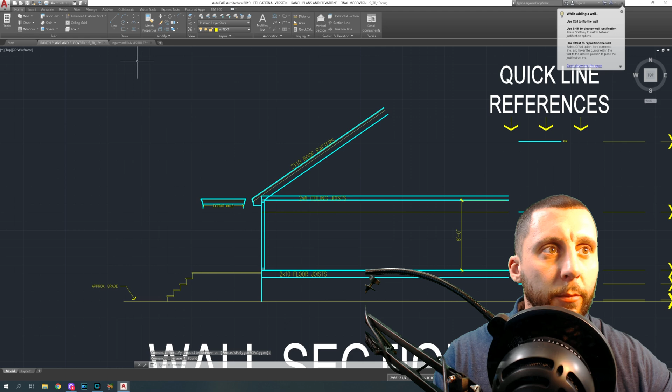So, why is that popping up? Alright, so here we go. So we were in here, okay? We did our trim and fascia board, and this is what it's going to look like from the side of the house. One thing I wanted to point out before we go any further was that the main part of this house here, where my main gable roof is going to go across, comes out to be 30 feet. Okay, so that means that the peak of that will be 15 feet in.

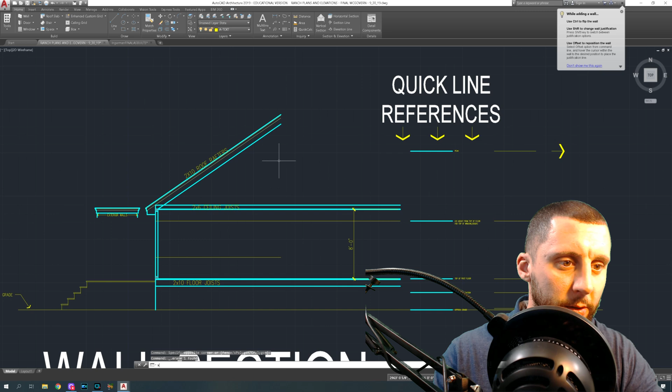So yesterday, I believe we took a line, and we went 15 feet, and then we went up. That means that all of these lines are going to get extended there, and that tells us that our peak is at this very top point. So now I'm going to move all of this stuff out of my way. I'm going to move this up and that up. Based off of my blue peak line, I'm going to go up on the green line until I get to my yellow line. All right, so that's where my peak is.

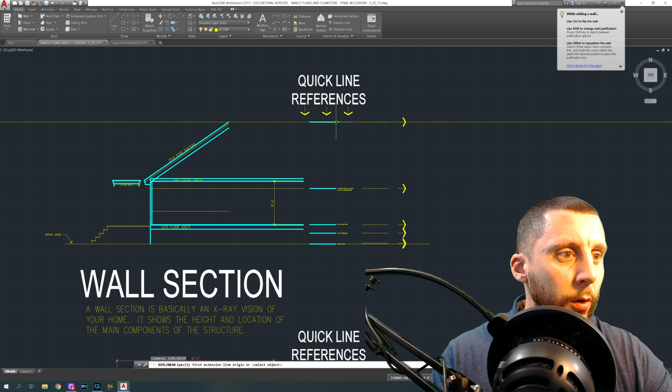So now when you were doing your measurements, hopefully when we go to measure this peak here from the grade, your measurement when you were standing outside trying to snake your tape measure all the way up to the peak came out somewhere close to 22 feet 6.5. Now again, this house doesn't exist, but if you're 22 feet 4 or 22 feet 8, you're pretty close. It's really hard to get that measurement, but if you're off by like 6 inches or a couple feet, then that's not good. Okay, so that's our peak.

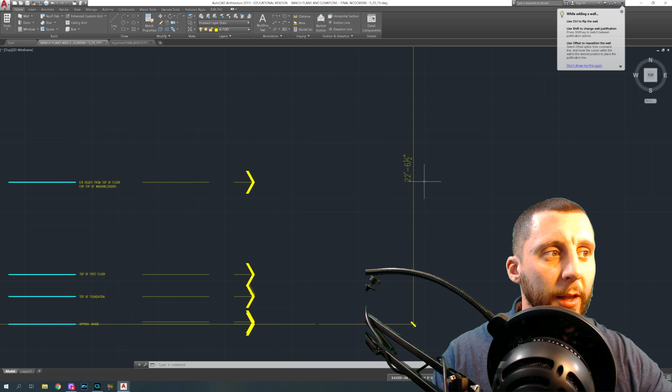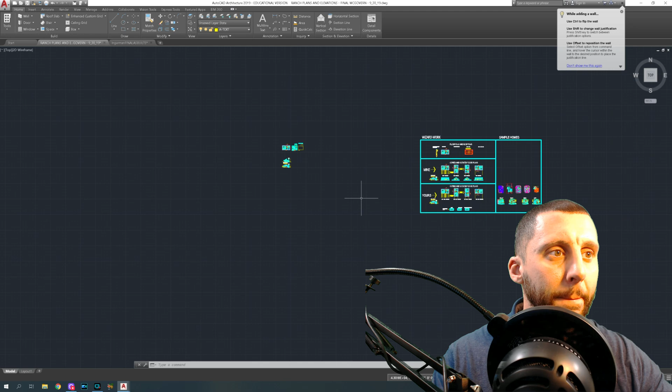All right, so now we're going to get rid of this line. We're going to finish what we were doing over here. This is what it's going to look like from the front of the house. So if I were to show you some other elevations, you see that these lines go across the front of the house. In the side views, they go up, which is what we already have. Okay? All right, where are we at? So here's what you do. If you're modifying one that I have, you would take construction lines, X line, and you bring across this, this, this, and this, and you can see what that's going to do to change these lines. If you don't have mine, then we're just going to make this from scratch right now.

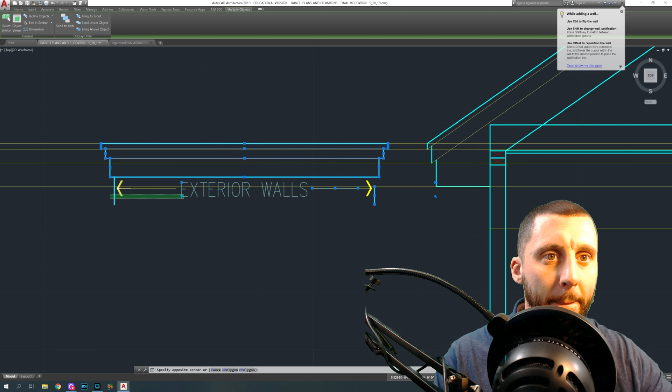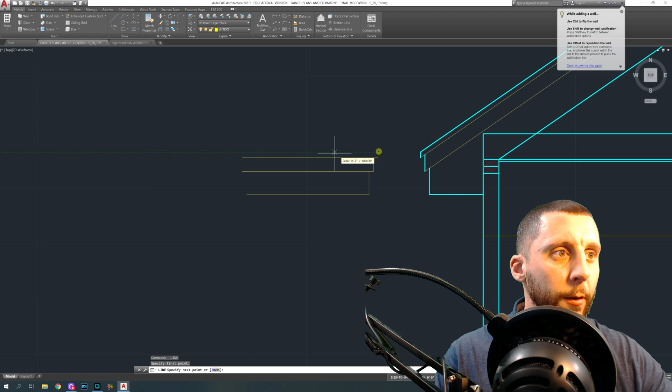You got 4 lines like this. Go here and slide, click and go down. Then you're going to go in 1, and you're going to go down, and then you're going to go in 1 again and go down. Get rid of this arrow. And then you can get rid of these. We can take these horizontal lines and bring those across. You're going to have a line going across here and up here.

And then I like to take these 3 things right here. Make sure there's no little baby lines. Okay. Take 1, 2, 3. Mirror that across the midpoint. Erase the source, no, and extend. And you get something, this one's a little long. You get something like that, okay? Match properties, as you can see, I did some match properties on mine. The blue stuff is going to be the top and bottom line, and the side lines. 1, 2, 3. 1, 2, 3. And then this tan color for us is the actual fascia board and trim, okay?

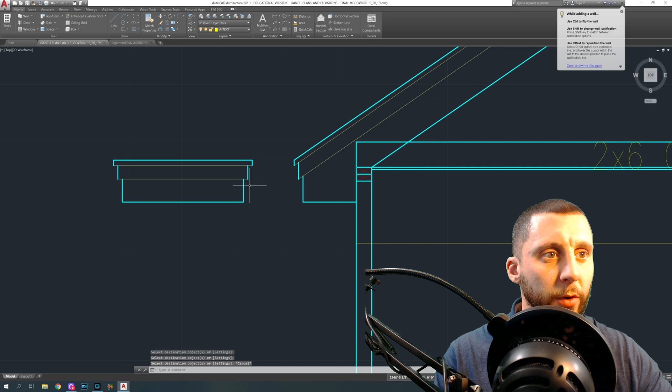So now we have that. So what I would do is I'd bring that across. Copy. I like to leave it over there too and just bring a copy over. And that's going to go right here. And I had some text for that. Let's see if we can get that back. Trim and fascia board. Oh, and we'll grab some exterior walls too.

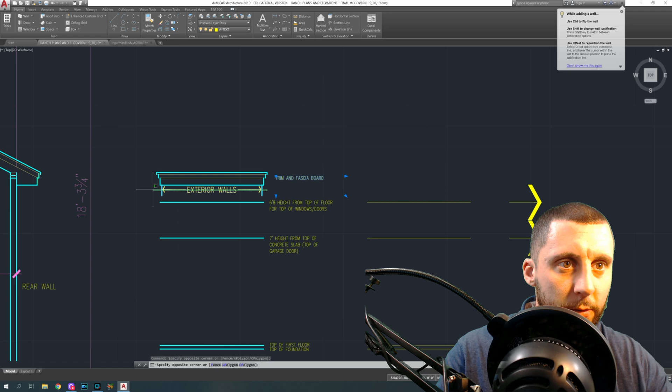So that's going to go. I like to keep everything super organized and neat. So that's going to go something like that, only this is going to be on that corner. And we'll just get rid of these lines here. That's only if you're trying to keep yours neat.

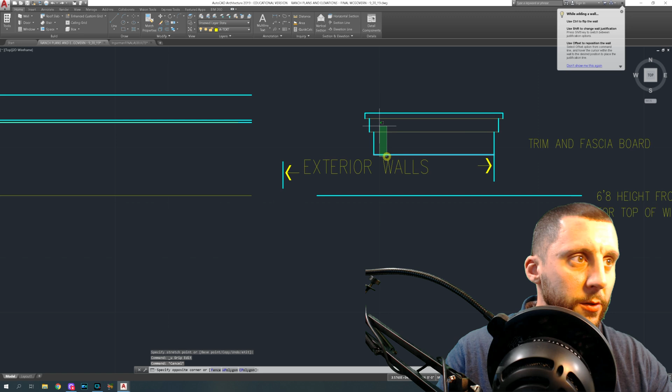Probably going to have to drop this down to another line. Or, you know what, let's do this instead. Why don't we just go like this with a box, stretch that out a little bit wider. And now I can move my text over.

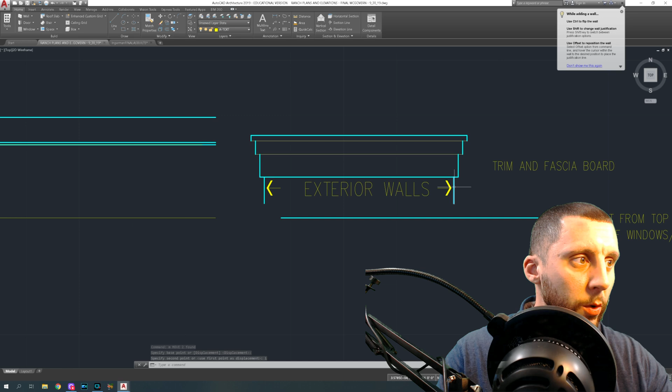Move my arrow and my line over. Oh, and by the way, these are actually 1 inch further in. So it comes like this. It goes 1, 1, 1, and that's where the exterior walls are. So later on, when we bring all these lines across, we'll be able to bring this entire piece all the way across the front of the house and all the way across the rear of the house.

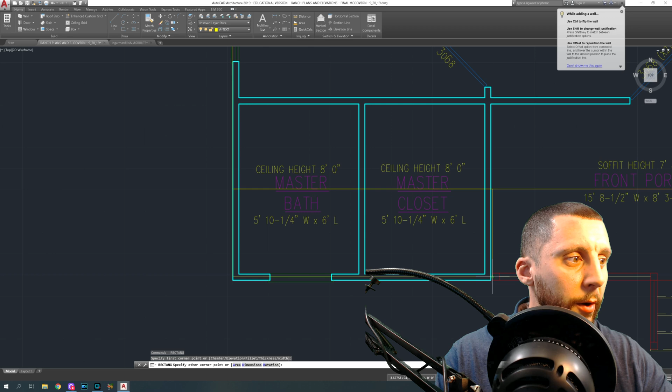Okay, but we'll get to that next. Okay, next thing, foundation. What you're going to want to do is you're going to want to take a box here. You're going to want to go over this back area, which is going to be its own little area. You're going to go over the main part, which is going to be from here to here, and then you're going to go over this little front bump out right here, from there to there. You take those 3 boxes, you move those over.

Okay, then you're going to start a wall. You're going to go to, I hope you guys have all these options. If you don't, you can open up one of my past files and you can just grab it off of one of the drawings in there. But you want CMU 6, and basically this is just going to be all the way around the outside in this main piece.

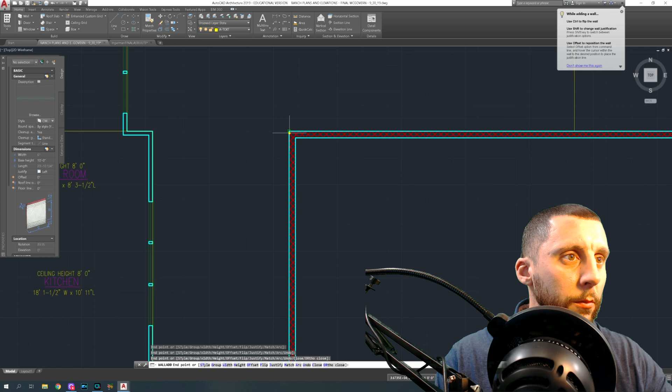Okay, that part's the easy part. This is going to get extended down.

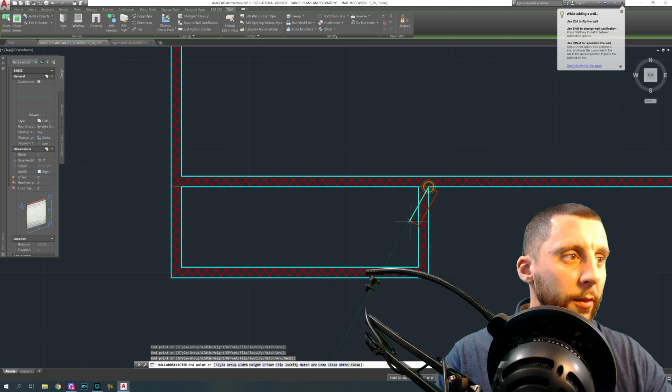I can click on this again and do add selected. I have to change my justification though, so I hit shift twice. And then I come in like that. And then I want to go ahead and erase the boxes that I have behind.

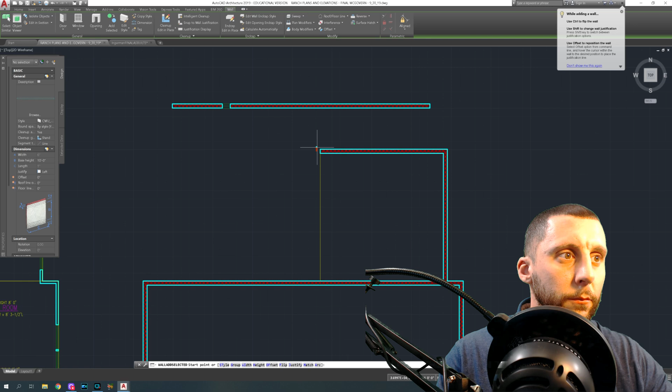There we go. And then we're going to do the same thing. Add selected. Go around the outside here. Change my justification. Bring that part in. Get rid of the box.

All right. Now, in the middle of this house is going to be a big girder going across, because I would assume that these floor joists are going to be running this way. So what you want to do is you want to take a line, and again, this you would have measured, so you'd be able to tell, like, oh, okay, in the main part of the house, there's a girder going down the middle.

What this line is going to be, we need to know where all the little piers are that are holding this girder up. So what's going to happen is that girder is going to sit on top of probably a little block work right here and a little block work right here. But again, this could be totally different. It could be sitting on top of the block work that's already there.

The space between these piers of blocks or block work, it could be every 6 feet, it could be every 12 feet. It really depends on the house. So you'd want to get into that crawl space and you want to measure all of those things and know where those things are.

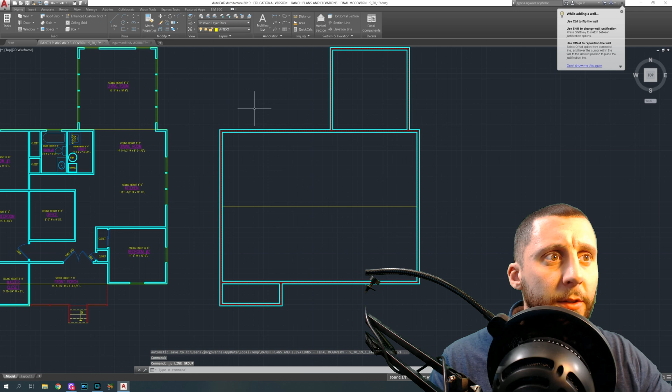So in order to do that, let's just say that we have a line here. Actually, before we draw that line, let's take one of these and just pretend that we've got, let's say, 2 blocks here. So we're going to go 16. And you know what, that could be 1 block, 8, something like that. I'm going to take that and mirror it across.

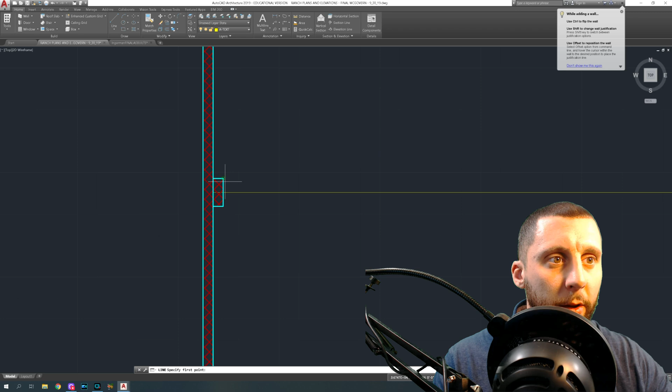Erase the source. No, okay. Now let's just pretend that we have a line here. I'm actually going to make that longer so it's easier to erase. And let's just say we have a line in the middle. Clearly there's going to be one in the middle here.

So again, click on your wall, add selected. Now also, you see up here, this looks like a window, but it's actually a vent. So if you notice that there's flood vents around the outside, it's not imperative that you have the position of them, but it's not bad to know that on the plan.

So if you can get those and figure out where they are, you can do that on the exterior by measuring on the foundation and saying, okay, I've got one at 8 feet, I've got one at 12 feet, I've got one at 10 feet.

Oops. Hang on one sec. Why is that popping? I'm still recording.

Yes, okay. All right, so we're going to have one in the center there. So we're going to grab this wall and do add selected. Let's say we go 8. Oh, come on. Another 8. Maybe this one is a double.

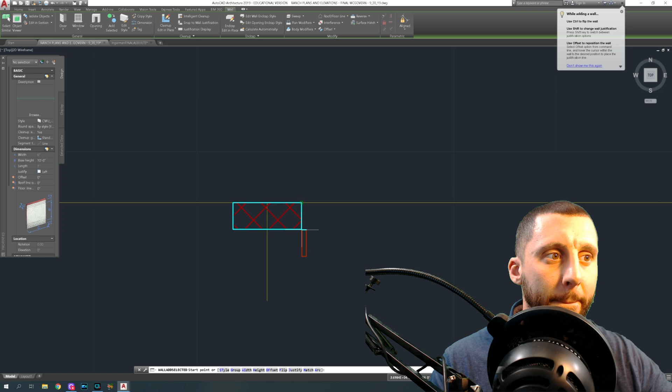It doesn't like that. Why is it not doing that? Here, let's try this again.

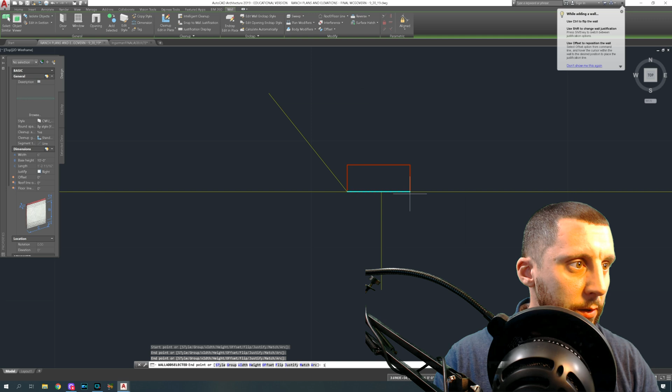What I'm going to do is draw a line off of this corner, my start point. Let me get rid of this. Okay, we're going to do another add selected. We're going to go from here, 16... yeah, see, that's the same thing.

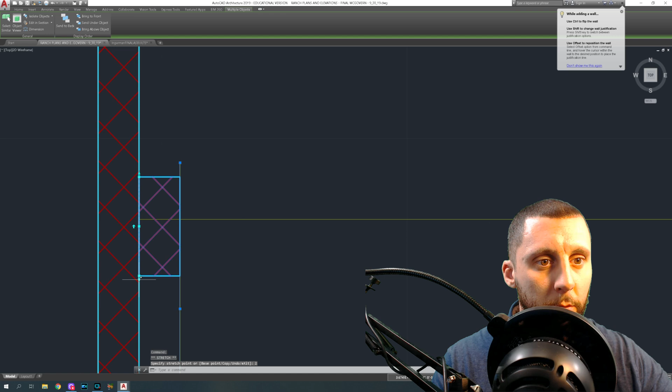Oh, why am I going 16? It should only be 12. Sorry, these blocks should only be 12 inches. So we're going to go 2, 2, get rid of, and we'll keep that for now.

I'm not sure why this is coming up with an error like this, because these walls are not on top of each other. So I'm actually going to just put 1 just so it doesn't give me that error. And then I'm going to drag this back just like I did on the other one, 2 inches on both sides.

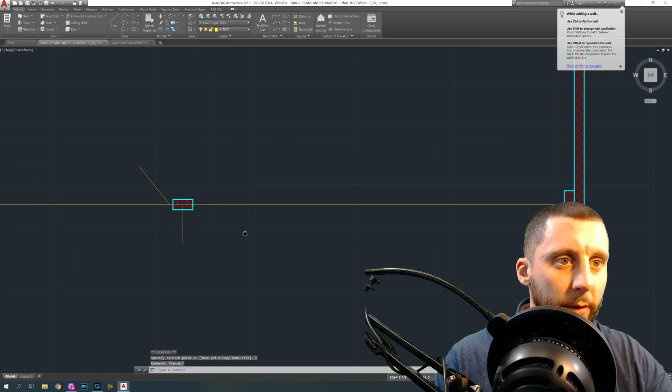Okay, so we've got that one. This one we got to drag back a little bit, 2 inches, 2 inches. Okay, so now halfway between those, let's get rid of this line now. If I took this line and went from midpoint to midpoint, and then clicked on that line, I could dimension it too, but if I click on that line, go right-click Properties, I've got 18 feet.

So if I put one right in the center, that span is about 9 feet, and that might work, or it might not. So I'm actually going to do 2 here. So 18 feet, let's just say we have one at 6 feet and then at 12 feet.

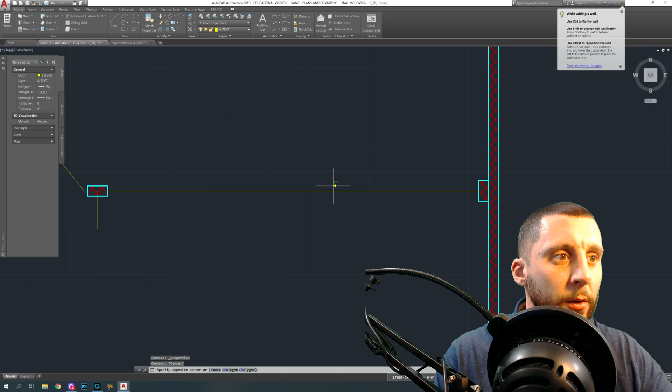So I'll take this, I think that was 18 feet 8 or something, so I'll make this like 6 feet 4. And then we'll do 12 feet 8, or something like that. I don't know if that math was a little off, but that's okay.

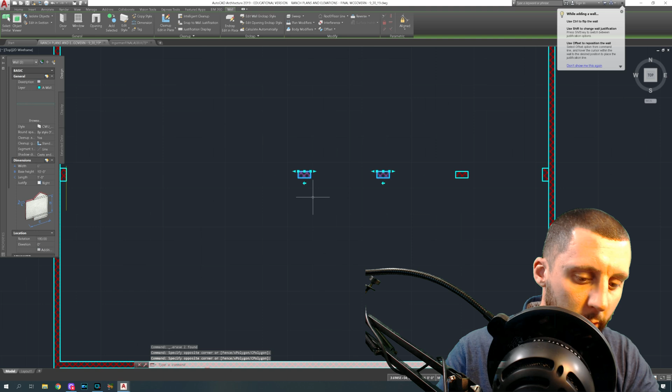And then might as well take 2 of these, do a copy off of this corner, and put it on that corner. So you get something like that. Now we're going to need a line going back down the middle again. That line is going to go from the very outside midpoint to the very outside midpoint.

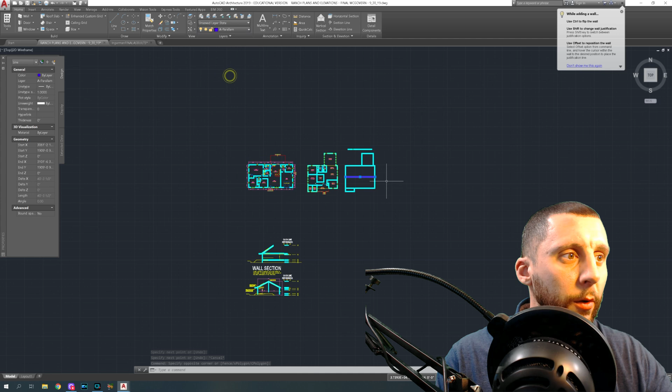And that line for us is going to be a purple line that is a parallam. Okay, so whether that's a parallam or steel or whatever it is - it's not going to be steel - but whatever that is, it could be a triple 2x10, triple 2x12, depending on what the floor joists are. Also, we just mark it with this dotted line here.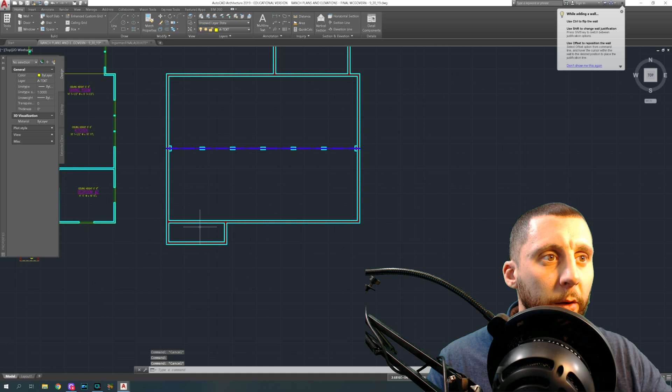Okay, so this line is a layer for us, just a purple layer. Okay, no piers down here. You might need one here. I would say the same exact thing.

So we'll go down the midpoint. We'll take a block. Now this one actually probably would sit right on that, so you wouldn't have a block there, but I'm going to put it anyway just because it's what we did before.

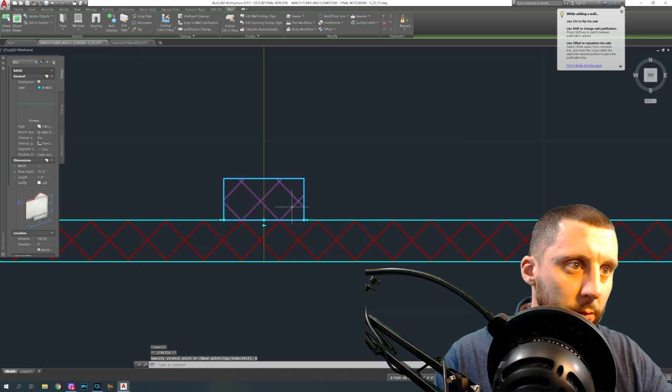All right, this is going to go 6. That's going to go 6. I hope I'm not wrong on these cinder block sizes. I'm not an engineer, so let's see. That would drive me crazy if I was wrong again, or if I second guess myself.

I think our internet is actually down. I'm going to use my phone.

Yeah, now that I'm thinking about it, it's 16 by 8. Ay, ay, ay. Oh, they are. I was right. Oh, crap.

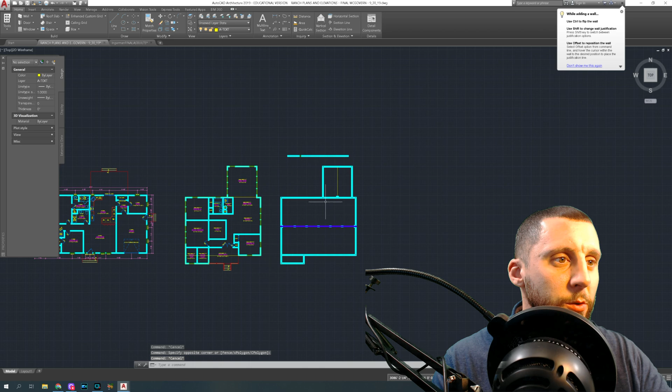Okay, so here's what we got to do. We got to select all these walls. Get all these in the middle. Get that one. Get that one. Get this one. Okay, and we're going to go back into the wall type, and we're going to make this CMU 8, which shouldn't affect anything.

It should just make it a little thicker. But all of these sizes, I'm not going to do this on the screen, but all of these sizes should be 16. So now, I stretched it before 2. They got to go back out 2.

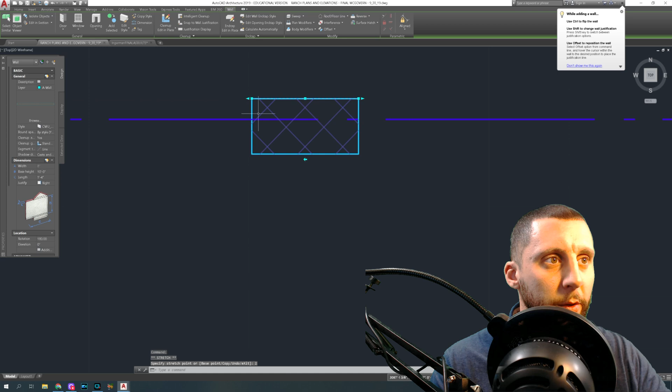All right, same thing here. I don't know if you guys really need to see this because we just did it, but I would put a block here, put a block in the middle, and put one at the end here. And then this line, once again, would go from end to end.

Let's see if this one held up. Yeah, it did. This is a little bit off, so we'd have to move that. But you guys get the general idea.

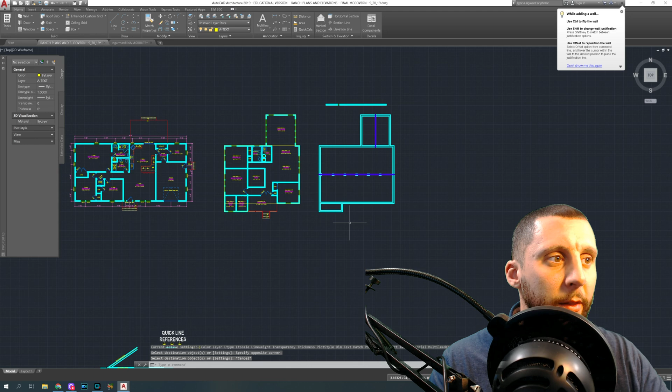Okay, match properties, purple, purple. All right, so that would be that. I'd put a label in there that says crawl space, or if it was a full basement, you'd write full basement.

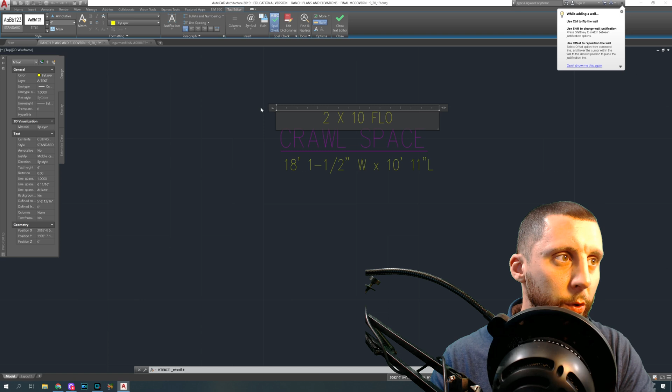Crawl space. Rather than the ceiling height, I might put 2x10 floor joists above, or something like that. That's just important information to know. For this, you could measure the whole thing, it's just 18 feet by whatever, but we probably don't even need that. It's going to be the same as what the first floor is, so we'll leave that alone.

Now, going back to our elevations. This is a one-story house. What you're going to do is bring the grade across. Let's see how much time we have here - we got another 10 minutes.

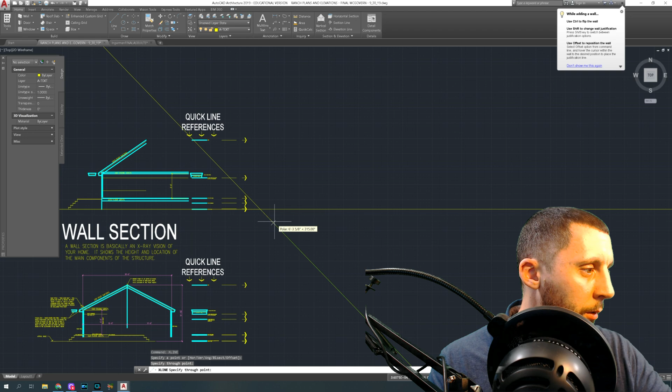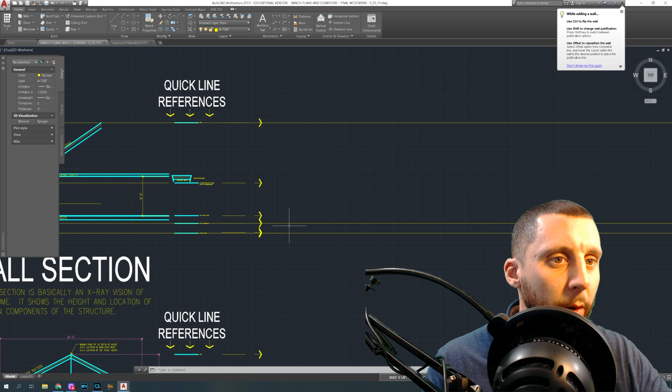We're going to bring the peak across. We're going to bring these lines across, but not just yet. We're going to bring the top of the foundation across, which just means that siding goes down until it hits that foundation. That foundation should actually run up underneath. This is actually in the wrong spot - this should be where everything sits on top of. All right, top of foundation.

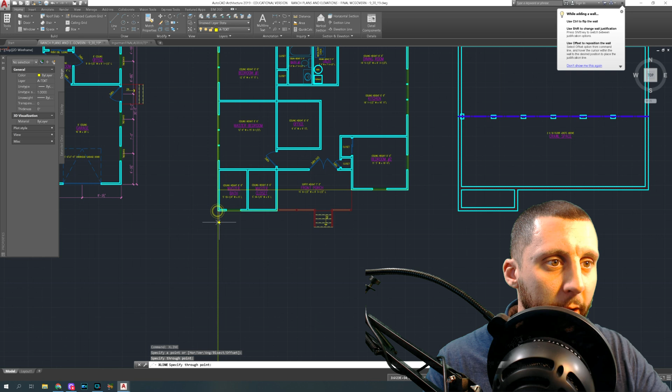Because that's our double 2x10 or whatever we put down there, 2x10s, this comes across. So then you're going to bring down - and I have other videos on this stuff too where I explain this pretty well - you're going to bring down the left side of the house, the right side of the house, and all windows and doors.

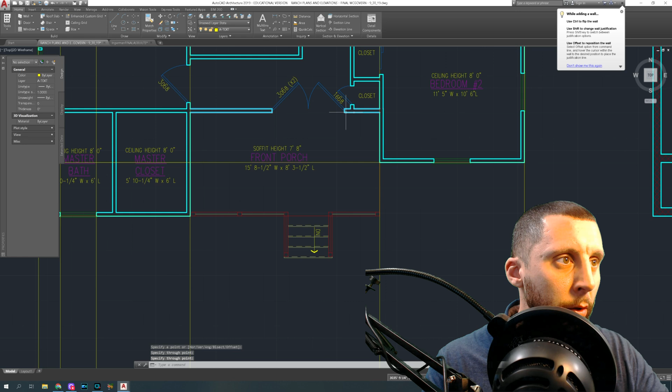And you'll see in a second it starts to take shape. Left and right, every corner goes down. We'll do the deck later. Every corner, left and right of door, every window, left and right.

And you start to get this shape right here, where what you're going to want to do is pick the outside lines: 1, 2, 3, 4. I'm in trim right now - not a quick trim, I just type trim and hit enter one time. And then I hit enter now, and I'm going to trim everything off outside of that shape. So you get something like that.

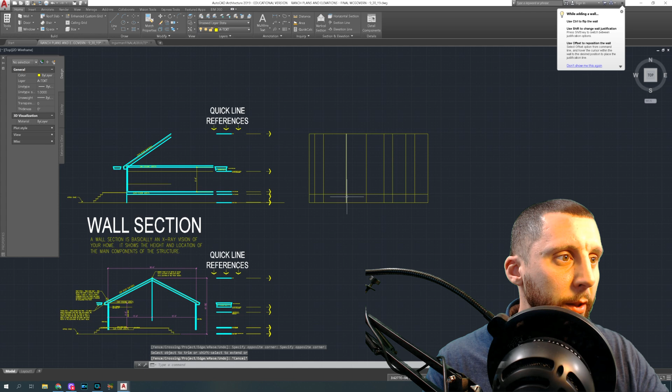Now go ahead and trim all these lines. This is the foundation right here. This is going to be a window, that's going to be the doors - I'm sorry, these are the doors.

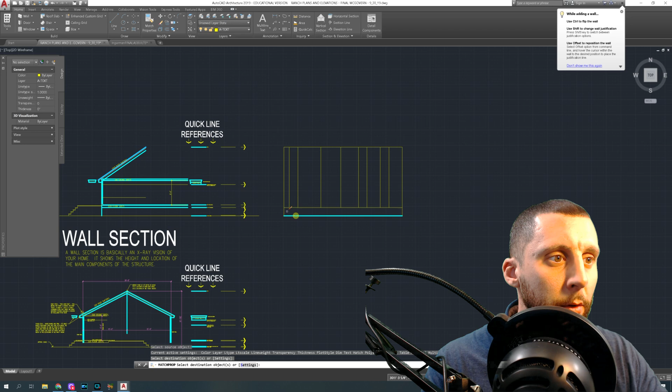This came off of this corner right here, so you know that that's going to be a bend. So we can start doing some match properties here on what we know. If we take the blue line and start matching some things like this - this is a corner, there was another corner that came down, I think that's that one, and I think the doors after that.

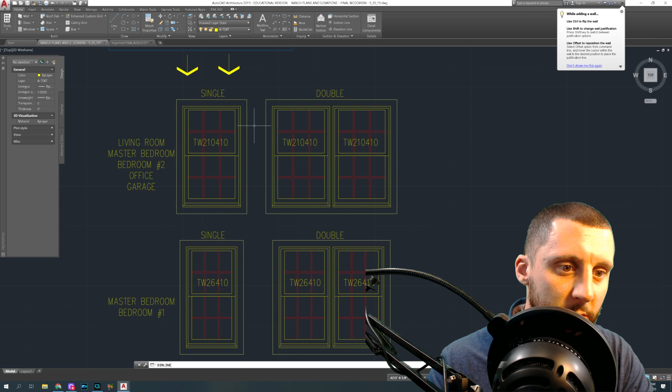Okay, so now as far as doors and windows go, in my project with my students here, I have these windows already set up. So let's actually see what size these are - these are 5 feet and 3/4, which the height doesn't really matter, by 3 feet. So we're going to use this TW210410 window.

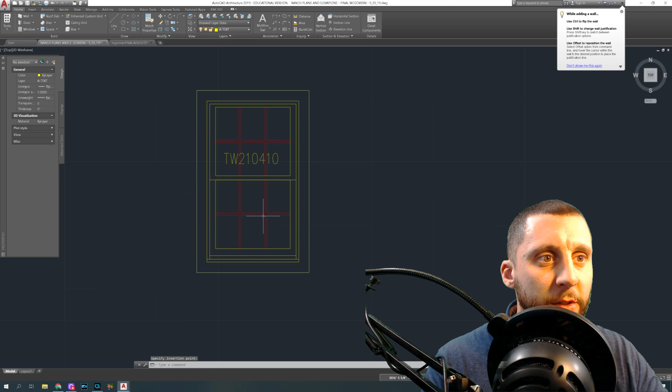And again, you're going to want to get into my old one, or you're going to want to make this - that's what it looks like right there, just something that looks like a window. That's all it is, this is just trim going around the outside, this is the physical size of the window. So where this will go, you'll take this in the top left corner of the window.

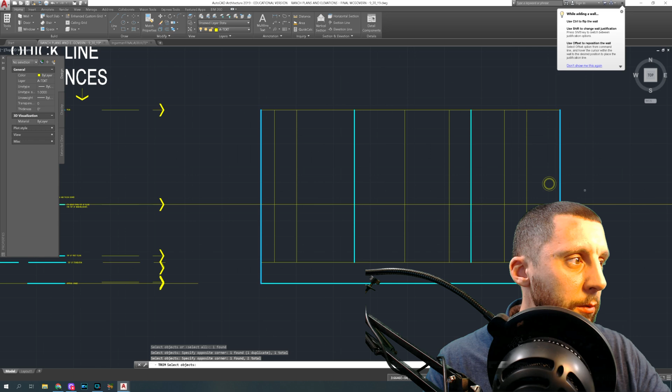Oh, we got to bring something else across real quick - we have to bring our 6/8 line for our windows. So this will go across. Trim, grab the 2 outside lines. Take your window, move that from this top left corner to this intersection - that's one. Copy, grab it from the top left, next one goes right here.

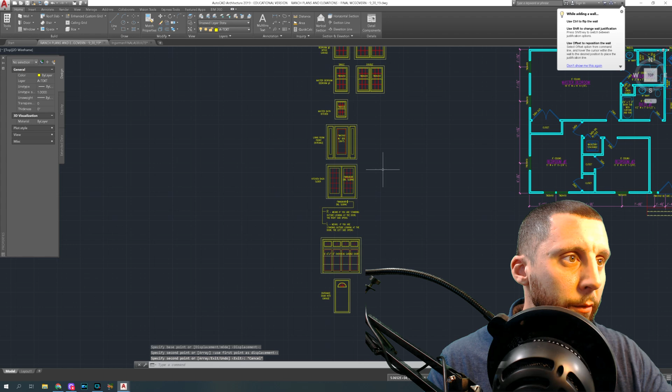Okay, now door - I have a door over here as well, single door. Not exactly, actually it's a double door. So we got to modify this because we have this, but we don't have the side lights. That's not the way I drew it - I drew it like it's a double door, right? So what we're going to do is we're going to get rid of these.

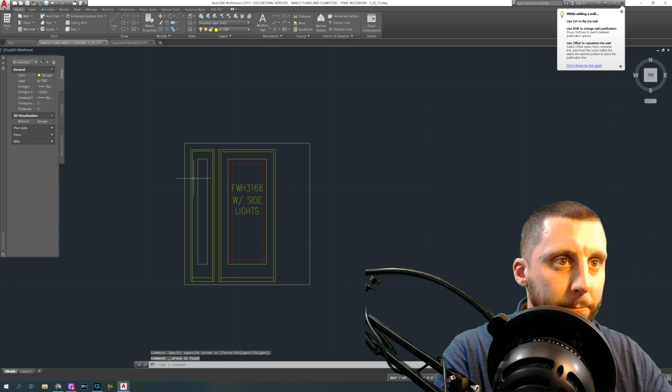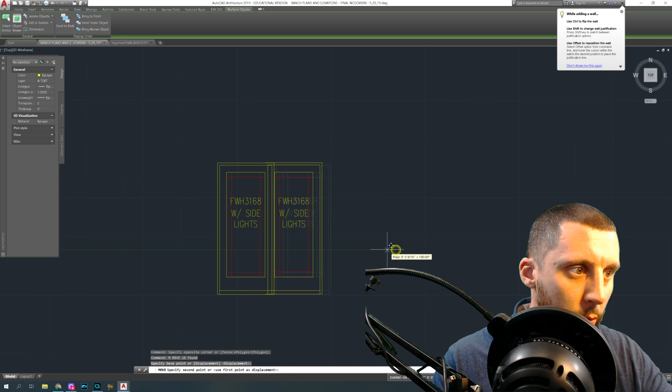Let's get rid of this for now. We're going to copy this, make our double door. Just make sure that that's 6 feet. 6 feet and 1/4. I don't know why that's coming out to be 1/4, so I'm going to take this, move this back 1/4 of an inch. Something like that. Okay. And then take a rectangle,

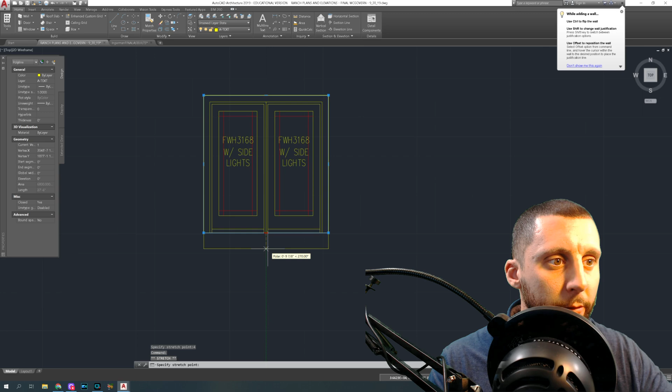go around the outside. This is the only one that the color is going to change. You're going to bring this out by 4, bring that out by 4, bring this out by 4, and this out by 4. And you do a match properties. You grab the tan color, and that's the outside part.

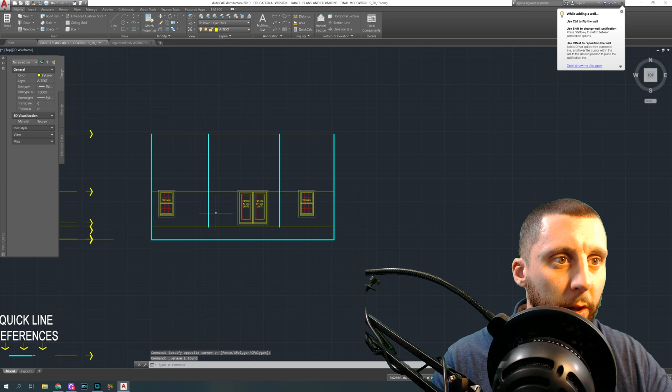So now we grab the doors, top left, and they go in there. And we get rid of these lines now. We don't need these anymore. So that's what the front of that house is going to look like. Trim those off for now, get rid of this line. But we're going to bring across this.

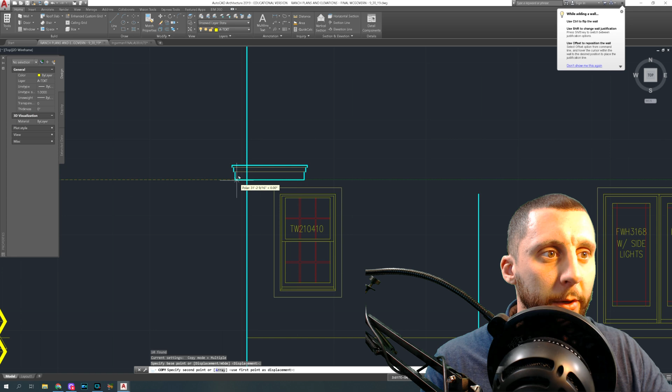Moving this, well actually let's copy it, I don't want to ruin what we have. Copying this from the top left of this exterior wall, bring that across, stay on the green line, you don't have to move it up or down because we already have it lined up where it needs to be, and click the exterior wall. What you'll do here is you'll do a regular trim and click this line and then hit enter and then trim that part off.

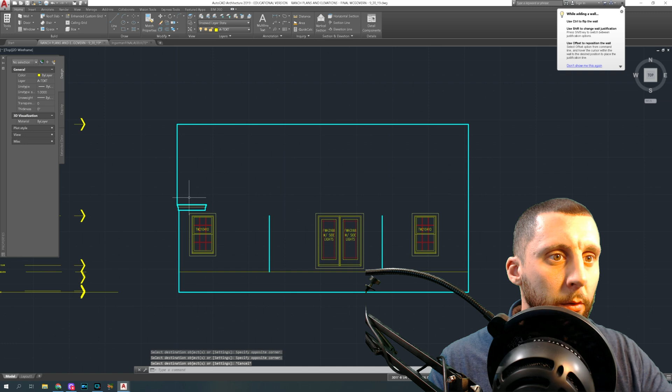This line will go up and we do a fillet radius 0 and that becomes the corner of the roof. Match properties, that'll also be blue. These, start here with your click, go down and to the left and get a box around just the end of that and do S enter for stretch.

Grab it from this point for now because we don't have another point to grab it from and click that on the exterior wall. But this same selection, except you have to hold shift and deselect this line, has to stretch 1 more inch. Trim from here, cut that off, bring this up. Fillet radius 0.

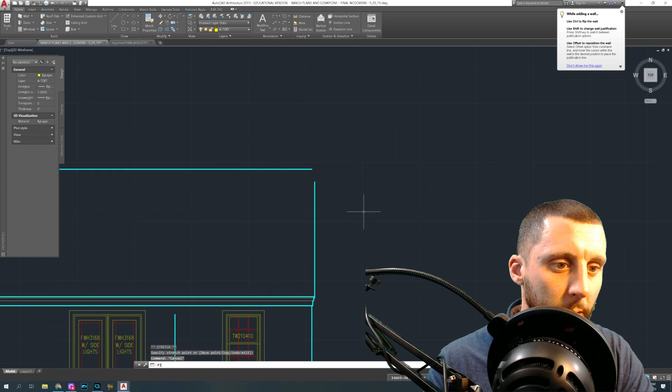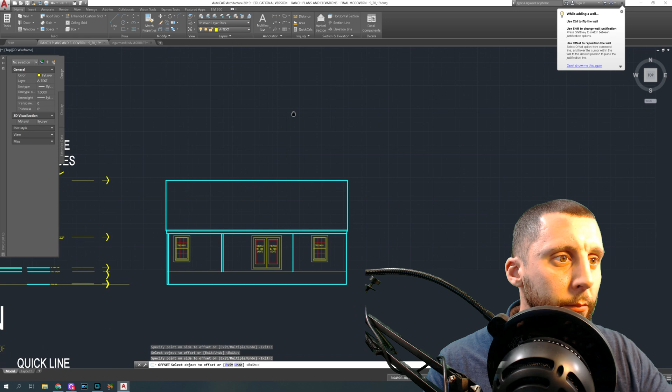Alright, how much time do we have? We're running down. This will get extended there, that'll get extended there. We'll do an offset of 4 inches for the siding piece, so every corner piece of siding. Now I'm going left because that corner piece of siding would go from here to here. So this is 4 inches right here, right? This one is going to go right.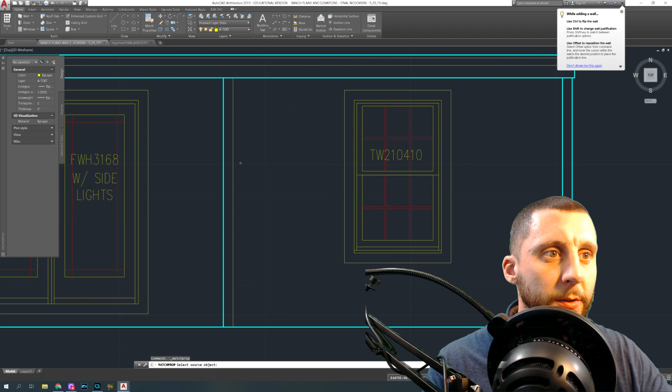Match properties, grab the tan color. That's that and that and that. That gets trimmed off. We want this blue line to be that blue line, and we missed one on the right side. Okay, something like that. Match properties again, like that. All right, so that's the front of the house.

We're going to have a roof here that we're going to do in our next video. And actually, some of this is going to get cut off because that's going to come forward. So this will be here. Let's look at our floor plan for a second. Yeah, this is just going to have a regular roof on top of it. So it's actually going to run from here to here. It'll stop, and then this will be a gable roof in the front, right here. Okay, so we're going to talk about that one in the next video.

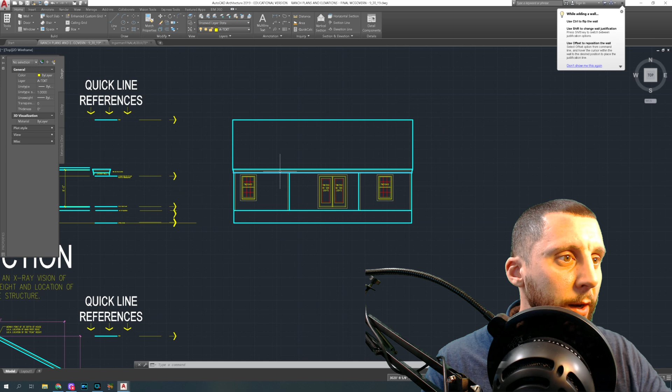I guess the last thing we'll do here is I also like to kick this in by about 1 inch. I think it just looks nicer. So what you do is go here, draw over 1 inch, go down, take your grade and extend it further. Get rid of the little line. Match properties, like that. Same thing on the far side. Take the grade, stretch that out, match properties on that line.

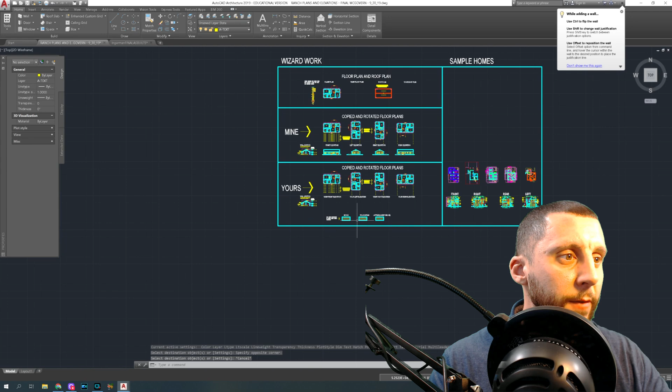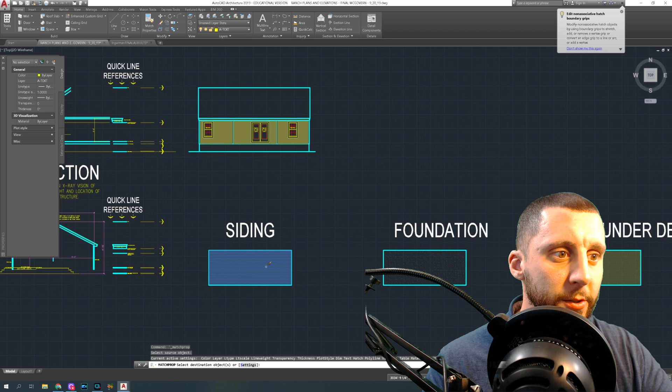Okay? And then down here in this file, I have siding, foundation, lattice. Those are hatch patterns. Go into the hatch tool. Click in these areas, 1, 2, 3. Now we're going to undo some of this later, but I just want to finish this up by showing the hatch patterns. You go to match properties, you do siding and siding. All right. You do a hatch pattern.

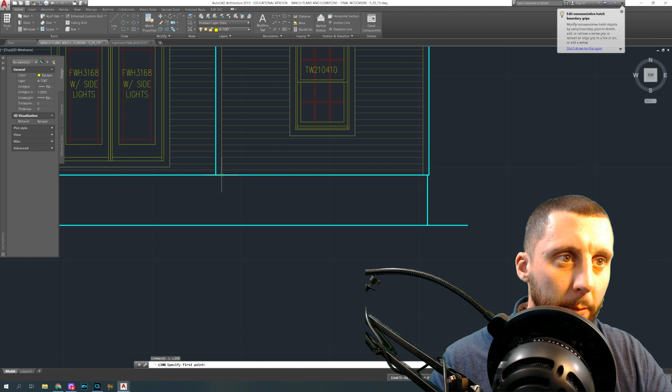Oh, by the way, we're missing something here. This, 1 inch to the left, is going to be another line of the foundation because this whole block sticks out further. Same thing over here. 1 inch in, that's going to go down. Get rid of the little line. Match properties. I like the 1 inch bump because it looks better than just having this line be straight down. I think it's a little confusing when it's straight down.

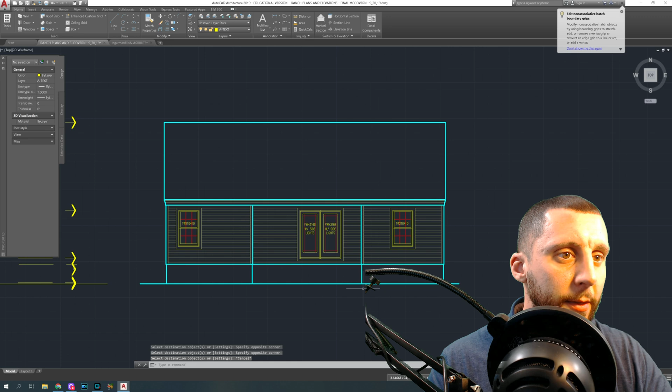All right, so we will leave that at that. That's the front elevation right there. It's got 2 windows and a double door, and we've got our wall section done, and I think we're good for now.